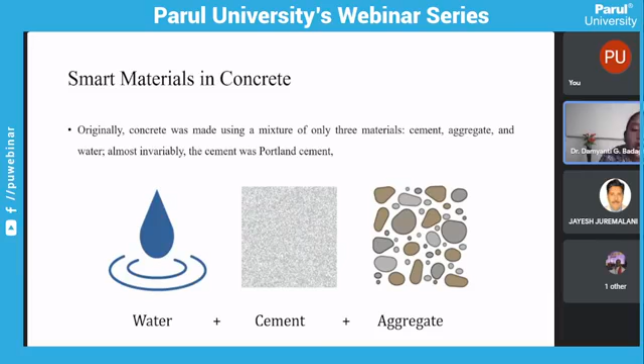So whenever concrete will be there, what we call smart material in concrete is water, cement, aggregate, and admixtures, super plasticizers, various types of supplementary cementitious materials. There has been lots of research done on this as well.

Why am I telling you this with that much confidence? Because I completed my PhD especially on this topic, and I did lots of research by referring to so many literature surveys and by visiting many industries.

So with much confidence I can say that different types of supplementary cementitious materials are available in the market, available with various industries as their byproduct, as a raw material, or as a waste material. These materials enhance the properties of concrete in different fields, and are also advantageous in cutting costs, and there are lots of positive factors of these materials. That's why these materials are called smart materials in the field of concrete, because they increase the strength and enhance the various properties of concrete.

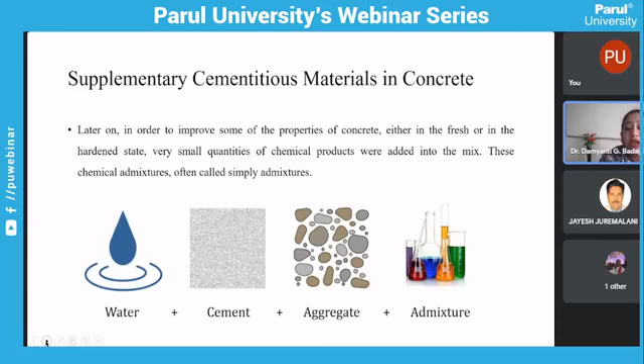So simply we can say water, cement, aggregate, admixtures, then super plasticizer, supplementary cementitious materials. Whenever admixture, super plasticizer, and supplementary cementitious material come into the picture while making concrete, we can say yes, this is the smart material when we are talking about concrete.

So there are different types of supplementary cementitious materials there in various forms. But why is this called supplementary cementitious material? Because we are using it in place of cement.

My dear audience, I want to be very clear that whenever we are making 1 ton of cement production, concrete production, at that same time 1 ton of CO2 emission is generated in the environment, and this is very bad for our civil engineering field. Because no doubt we are doing development, but simultaneously, because of our development and our concrete and cement manufacturing process, if CO2 is generating, this is a matter of problem. We have to look after how we can overcome that problem, right?

So we investigated supplementary cementitious materials, which are the byproducts, or we can say these are industrial waste collected from different industries. So we can say we are helping various industries with their waste management problem by collecting their waste in our construction field. Then whenever we reduce the use of cement in concrete manufacturing, we directly reduce the CO2 emission in the environment, because less use of cement means less emission of CO2 in the environment.

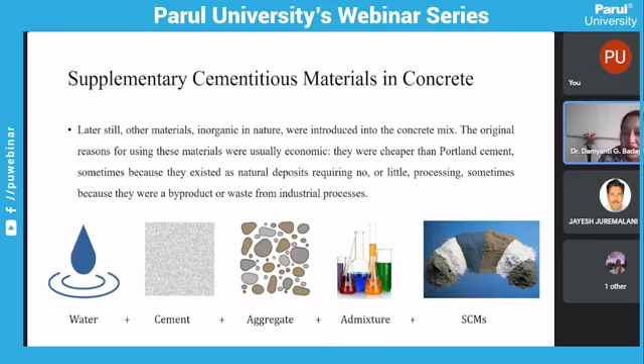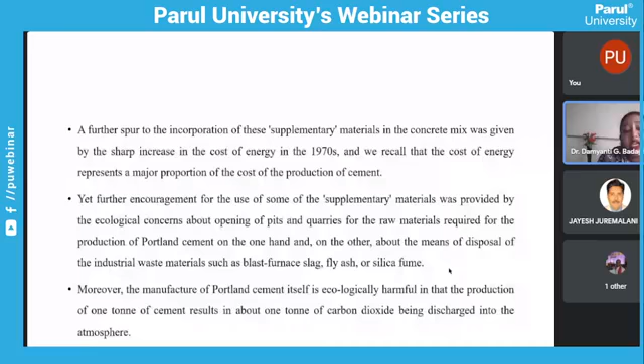So whatever general term I wanted to discuss, we already discussed in a formal talk, so I will not read the PPT. But yes, it would be incorrect to infer from the previous historical account that supplementary cementitious materials were introduced into concrete solely by the push of their availability, right? These materials also bestow various desirable properties on concrete, sometimes in a fresh state, but more often in a hardened state.

Whenever concrete will be there, we are mainly focusing on hardened properties, but not only hardened properties - whenever concrete is in a fresh state, in a workable condition, its properties are also advantageous, like its flow, whether it is workable or not, whether it is pumpable or not, right?

So these properties are also enhanced, and after the hardening of concrete, means after 28 days, or we can say after concrete exactly hardens after some time, what will be its strength in different aspects - not only compressive but tensile, flexural, impact, okay, then abrasion value, toughness - so many factors will come under hardened state.

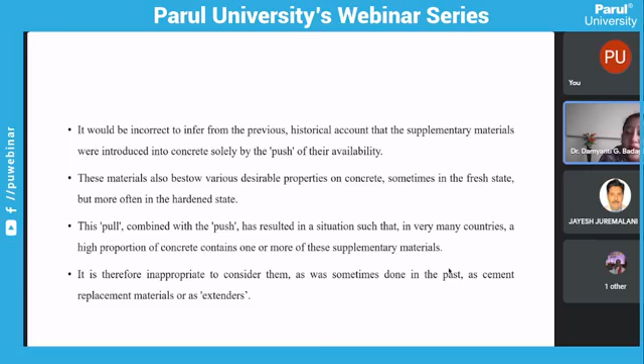Supplementary cementitious material enhances both hardened and fresh properties of concrete. It is therefore inappropriate to consider them, as was sometimes done in the past, as cement replacement material or extenders. They are exactly a smart material when considering supplementary cementitious material in concrete production.

If many of you are aware of this material, we will discuss it in detail. Before that, we will go through the list of supplementary cementitious materials currently being used in the field, which have really good properties that enhance concrete, and what smart role they play in concrete production work.

There is a list like fly ash, ground granulated blast furnace slag, rice husk ash, nanosilica, silica fume, metakaolin, municipal solid waste ash, bagasse ash, and lots of other materials. As time is constrained, we will try to cover most of the material.

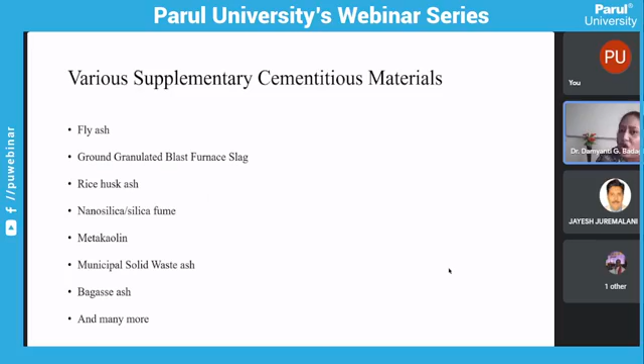The list is very vast. There are lots of materials, but these are the complete materials which practically fit for use in concrete manufacturing. Many people are using them in their research, and in some places they are using them in construction work too. But because of lack of awareness, lack of knowledge, or maybe some fear, people are not revealing what they used.

When I completed my PhD and wanted to check whether that material is suitable or not, I collected waste from one of the local steel industries and used that waste as a cement replacement for concrete manufacturing purposes. That material was found to be very good, because what we did was a 10 to 100% replacement at 10% intervals, like 100% cement will be there.

Our concrete made from 100% cement, but afterward we collected steel industry waste converted into powder form. So with 90% cement, waste will be 10%; with 80% cement, waste will be 20%. Such different variations we did, and lots of cube casting and lots of work we have done.

But afterward we have to see that this is laboratory work. We have to do practical work in a very good manner, but when we are actually using it in the field, is it visible that the structure can sustain or not?

So that material we used in Ichhapur for one water tank, and around a 200 to 300-meter road was prepared from that material. That work was done around 2017, and now it is 2021, but that structure is still in very good condition, and we are continuously monitoring whether there is any defect, crack, or bad thing in that structure.

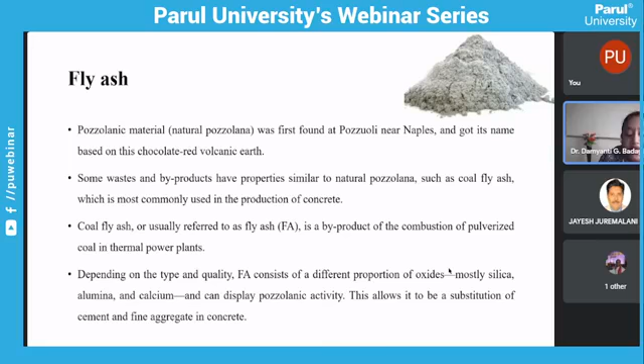Depending on the type and quality, fly ash consists of different proportions of oxides, mostly silica, alumina, and calcium, and can display pozzolanic activity too. This allows it to be a substitution for cement and fine aggregate in concrete, meaning in place of cement and in place of fine aggregate, we can use fly ash.

Besides fly ash, coal burning power plants also generate bottom ash, which consists of coarse granular particles collected at the bottom of the coal furnace. These particles are very porous, irregular, rough textured, and lighter than natural aggregate.

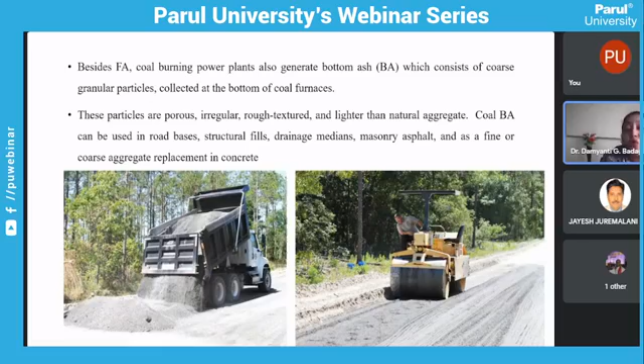Coal bottom ash can be used in road bases, structural fill, drainage medians, masonry, asphalt, and there are lots of uses of fly ash in granular form and in powder form also. These pictures are taken from Google, just showing the use of fly ash in road making activity, which is also our field of civil engineering.

Generally we are talking about the use of fly ash. From this pie chart, you can understand that for structural fills or embankments, 46.6% of fly ash is used in that sector. In agriculture, it's less than 0.1%. For mineral filler in asphalt, around 0.2% is used. In mining applications, blasting grit, and roofing granules, there is 1% use each. For waste stabilization, solidification, soil modification, snow and ice control, concrete, and various aggregate products, there are other uses too, mainly in road base.

From this pie chart, we can understand that fly ash is being used in different places in a very good manner. This is one of the good supplementary cementitious materials when we talk about concrete.

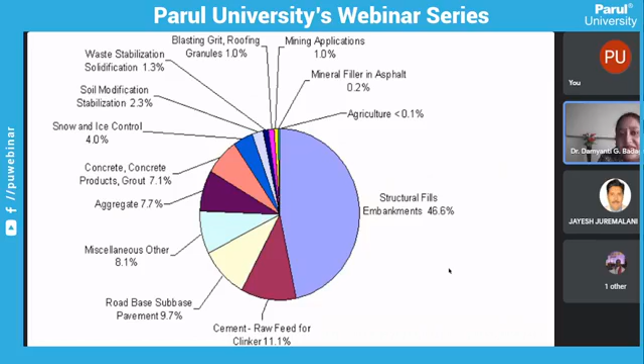So what is the characteristic of this material? Fly ash is a byproduct material and its physical, mineralogical and chemical properties strongly depend on the type and mineralogical composition of coal, processing condition of the furnace, and the collection and storage of the fly ash. These properties vary not only from one power plant to another, but also within one plant. It's not like fly ash will have similar good properties at all places, because at every place the ground level, geological conditions, and soil type are all different.

So if one plant is there, in one batch fly ash has a certain property, but in a different batch, the same property will not be there. There will be some variation, around 10%. In our field, 10% variation is allowed when we talk about any product, in view of concrete only. I'm not talking about any other material, but concrete.

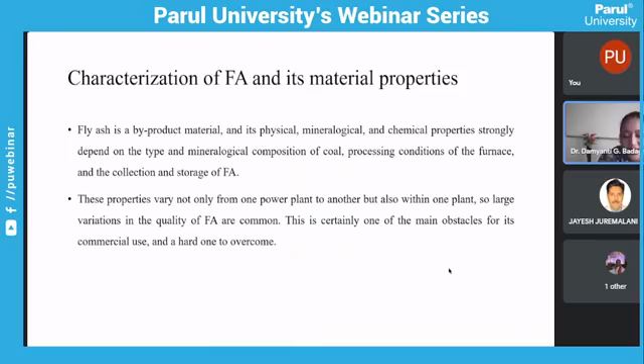Now we talk about physical properties. Scanning electron microscopy, or SEM, shows that fly ash is a heterogeneous material containing particles of different dimensions and shapes. We are all aware of that. Generally, fly ash particles can be rounded, irregular, or angular, but they are mostly spherical. The particle surface is generally smooth, but it varies between different types of fly ash.

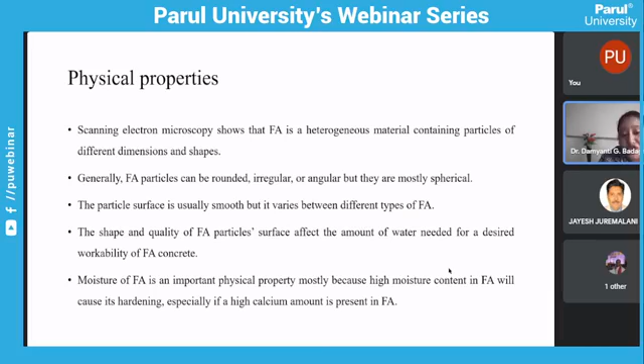Now we talk about chemical and mineralogical properties. The major ingredients of most fly ash are silica, alumina, calcium, and iron oxides. Besides these, magnesium, sodium, titanium, sulfur, and potassium are chemical compositions present in fly ash. But unburned carbon, generally measured through loss on ignition, is also an important constituent influencing high water and admixture requirement in concrete containing fly ash.

Why am I talking again and again about high water and admixtures? Because whenever high water is there, there are chances of decrement in concrete quality. That will not be a good quality concrete with a high amount of water. But this material is smart, having good properties, and the only disadvantage is that it takes much water.

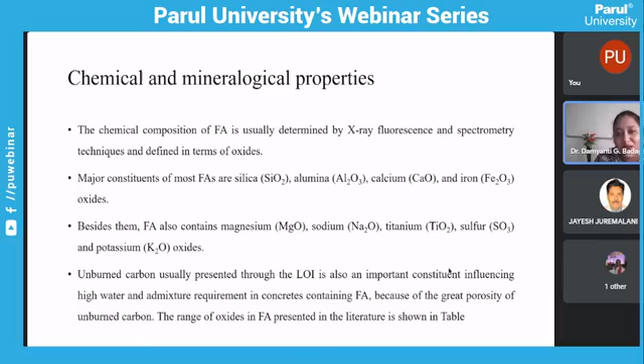There is one negative factor in fly ash concrete: whenever we are using fly ash in concrete manufacturing, we need high water. So how do we reduce that? That's why, because of that negative point, people question how we can consider fly ash a smart material. But yes, it has lots of good properties and advantages. Only one parameter is a concern, that it requires high water, but we have a solution in the form of a super plasticizer or admixture. So by using that, we can consider it a smart material in concrete production.

There are classifications also, based on its color, shape, size, and where it is available: class N type, class F type, class C type. Natural pozzolana such as volcanic ash, calcined clay, metakaolin clay, rice husk ash, such products will be there, and from that we are collecting ashes. So this is class N type.

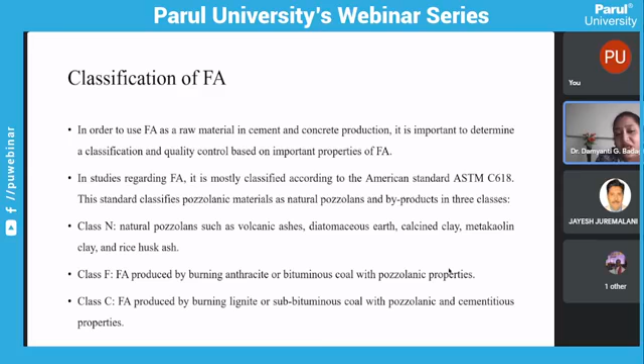If fly ash is produced by burning bituminous coal or has pozzolanic properties, that will be class F. And if we are talking about lignite or subbituminous coal, and we burn that and collect the ash, that will be class C. So based on the availability of material, whatever we are burning and what is the final product, that determines the class for fly ash concrete.

There is also a European standard classification, like A, B, C, based on LOI, loss on ignition. Maximum LOI less than 5% comes under class A. Maximum LOI less than 7% comes under class B. Under classification C, maximum LOI will be less than 9%.

And based on fineness, how fine it is, there are two types, type N and type S. If less than 40% retains, meaning it will pass through 45 micron Indian standard sieve, that is type N. And if the material retains on the 45 micrometer Indian standard sieve after sieving, that will be type S.

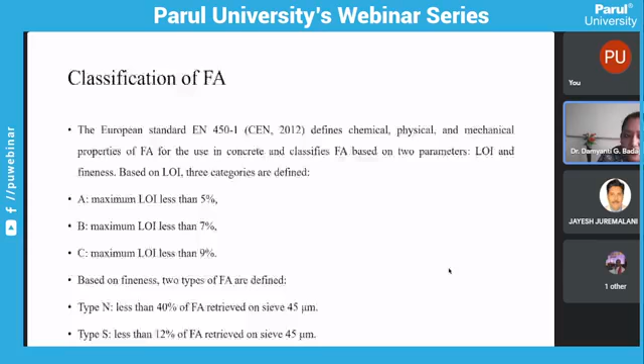Like many years ago, a researcher did such research and got certain data. Is it that after 100 years we will get the same result? So what is the research, what is the advancement, and what are we finding now? Whenever we use any guideline, specification or standard, we have to consider it as a base. But we must keep in mind, if the reference value is 50 and we are getting 100, then there is a matter of concern and we need to research why it is 50 versus 100. That much difference we can't tolerate, but in our concrete field, we expect up to 10% variation, plus or minus.

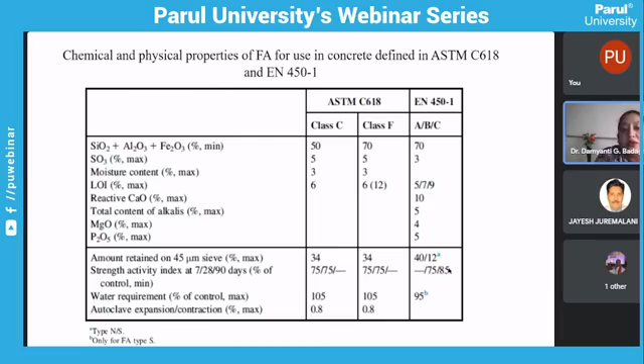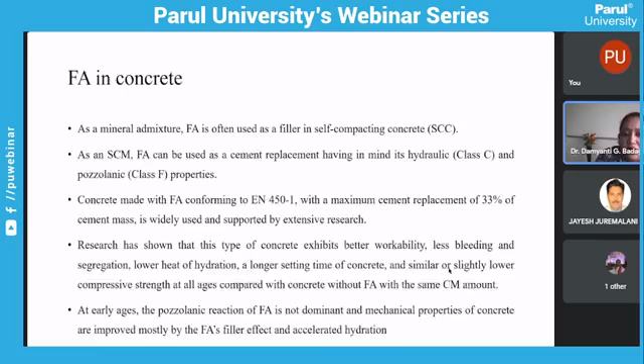Fly ash in concrete, as per American standard, European standard, and available guidelines, maximum cement replacement of 33% of cement mass is widely used and supported by extensive research. So whatever good properties the concrete has, exactly 33% replacement with cement can be used.

CanMet: in 1985, the Advanced Concrete Technology Group of CanMet Canada started a project to develop structural high performance, high volume fly ash concrete, called HVFAC.

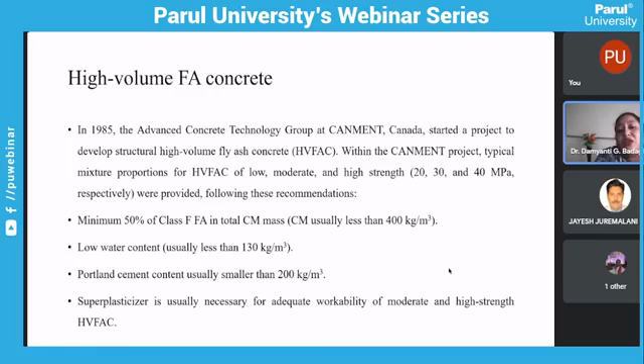Within the CanMet project, typical mixture proportions for low, moderate, and high strength were fixed at grades like 20 megapascal, 30 megapascal, and 40 megapascal. For the 20 megapascal strength after 28 days of curing, minimum 50% class F fly ash in total cement mass was used, less than 400 kilogram per meter cube cementitious material. Lower water content was used, 130 kilogram per meter cube, and Portland cement generally less than 200 kilogram per meter cube. Such data was used by CanMet Canada to produce high volume fly ash concrete.

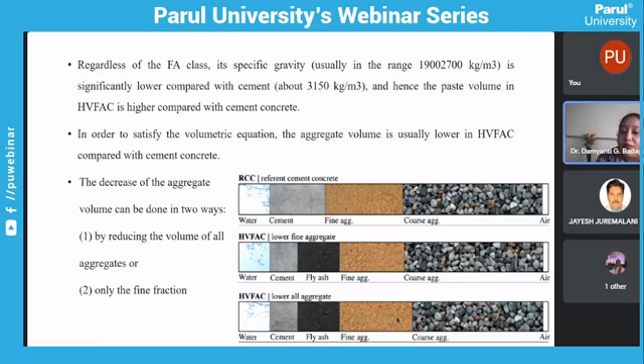So we can say fly ash content in high volume fly ash concrete stays the same across different categories of concrete manufacturing, but by adjusting fine aggregate and coarse aggregate — if we use more fine aggregate, coarse aggregate will be in a lesser portion, and if we use less fine aggregate, coarse aggregate will be in a higher proportion. So by using fly ash in place of some cement, we can make high volume fly ash concrete.

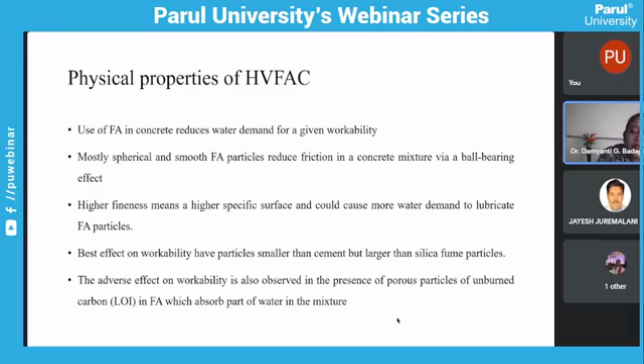In fly ash concrete, this reduces the water demand for given workability. It is spherical and smooth, so we can say workability properties will also be good in high volume fly ash concrete.

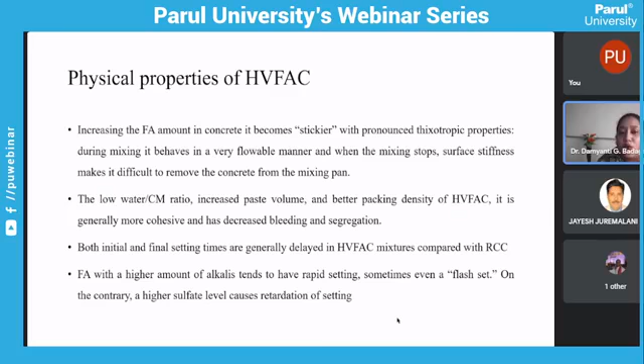The low water cement ratio means bleeding and segregation problems will be avoided. Whenever concrete manufacturing is done, if you visit any site, you can see this bleeding segregation problem where concrete lump is at some place and water comes out from that lump, meaning concrete is not properly mixed. Such problems occur on field, but when we use this type of concrete, we can avoid such problems.

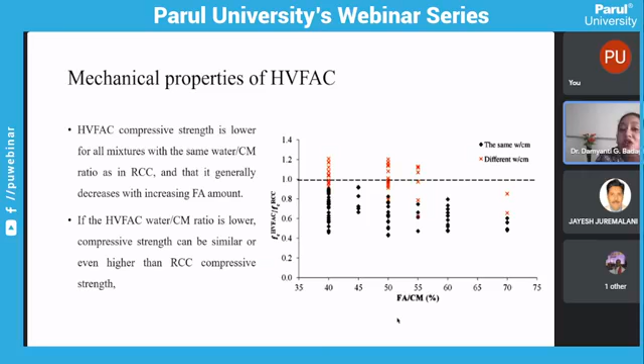Whenever we go for a high water cement ratio, we definitely have to compromise with strength, and in concrete we can't compromise with strength, so we have to find an alternative solution. This deals with the strength and water cement ratio discussed in the previous slide.

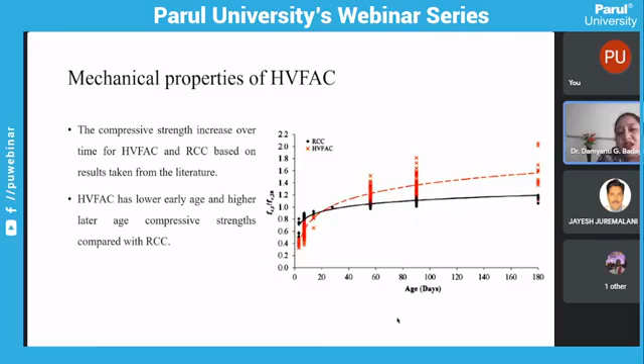So, reasons for lesser use of HVFAC: we discussed so much, but why aren't we using this high volume fly ash concrete that much? There is a little inconsistency of fly ash characteristics, and lower early age strength — if we need early age strength very quickly, it will not work in those places.

And right now, construction is going on in a very fast manner, so that will not work out.

There is contradiction in the results found in the existing literature regarding physical, mechanical, and durability properties, meaning different researchers have different results, with not much similarity. So there are lots of contradictions and result variations, and people get confused to use HVFAC in a practical field, which is why it's not in proper use.

If we do a series of tests one by one on that HVFAC, then we can get an exact idea of how much amount we have to use and how we have to use it.

There is also a lack of adequate standards, no perfect guideline, and a lack of results regarding full structural elements made with HVFAC. There is very little data available regarding structural elements prepared from HVFAC, which is also a reason people are not using HVFAC in a good way.

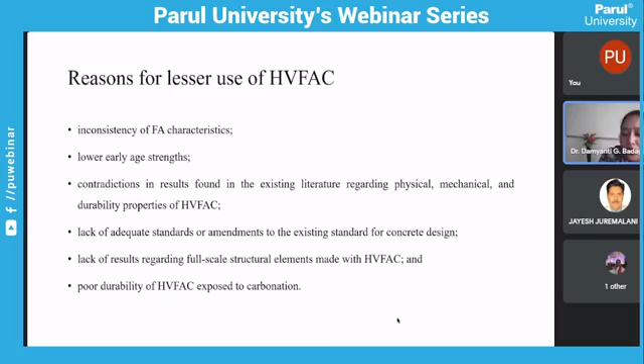Then there's poor durability. We can't blame this on the fly ash itself, but on lack of knowledge, lack of awareness, lack of standard availability, and lack of consistent results or test series in that field. So we can't blame the material.

Then another material is GGBFS. Most people know GGBFS. This is the material we collect from the steel industry during the iron ore process. Whenever we are extracting iron ore, a granular sand type of brownish or whitish material comes out during the process, and that material is ground granulated blast furnace slag.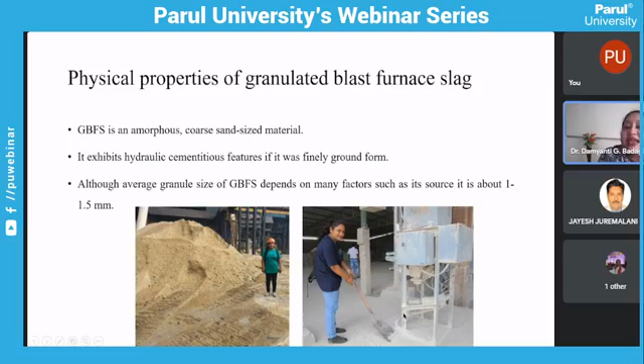So these are the physical properties of GGBFS. If any material will be used, we first have to look at its physical and chemical properties, because we are using it in concrete as a supplementary cementitious material.

Material can be used in place of cement or in place of aggregate. But here we are talking about it in place of cement, because if I discuss each material by focusing on fine aggregate replacement, coarse aggregate replacement, cement replacement, and water alternatives, I think I'd need a week to explain everything. But since I have limited time, I'm focusing mostly on cement replacement type materials. If anyone is interested, they can get my contact from the organizer, and I will share every detail and knowledge with you guys.

Whenever we talk about any material, we have to focus on physical and chemical properties first, because we are doing this for cement replacement. So these properties should be similar to cement, or matching, or nearby to cement. That's why in each and every slide I will share the physical and chemical analysis properties, so you can see these properties are similar to cement and we can use it with confidence as a cement replacement.

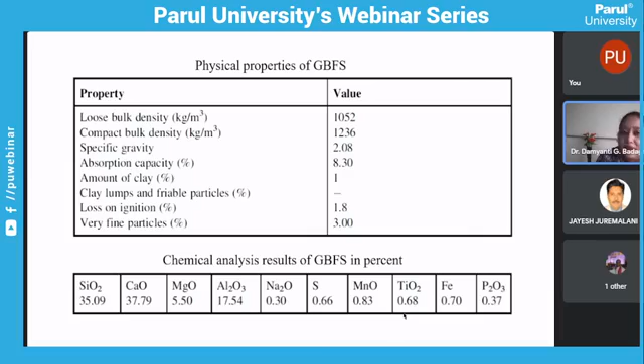So these are the chemical properties like silica, alumina, calcium, magnesium. As civil engineering people, we know that these types of constitutions, or compositions, should be there in cement. So definitely any supplementary cementitious material, or any material similar to cement, should have such elements. Blast furnace slag is a glassy material when cooled rapidly by water.

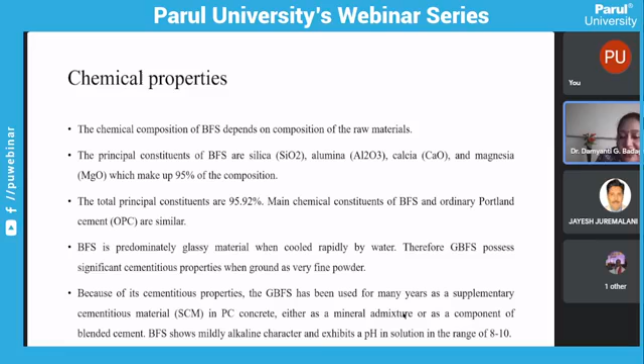As per the figures I showed you in a previous slide, this is a granular material and we have to grind it, and then we can use it as a supplementary cementitious material in place of cement.

When we talk about the fresh properties of mortar and concrete containing GGBFS, the blast furnace slag increases workability. So if workability is good, we can use that concrete mortar in any place. Compaction factor test results show that the water-cement ratio decreases in order to maintain the same workability of concrete mix compared with 0% GGBFS.

Whenever we increase or use GGBFS, our concrete workability will be improved, but up to a certain limit. If I discuss my case, I performed a test series. Why am I saying this with confidence? Because I tried all variations from 100% cement down to 10%, 20%, 30%, 40%, 50%, 60%, 70%, 80%, 90%.

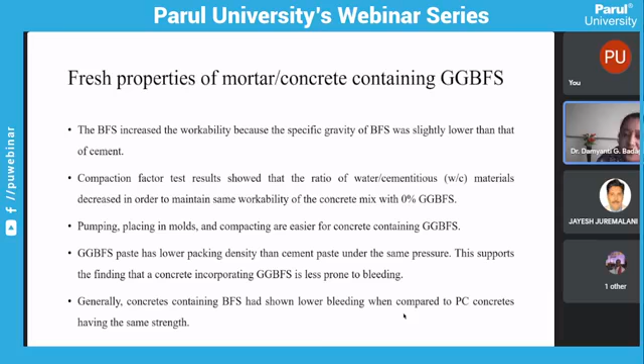All variations I tried, and for all variations I checked the strength. So from my research, my experience, and the data available to me, based on the continuous test series I conducted, I can share that 50% replacement of GGBFS is very good.

If I summarize GGBFS as per my knowledge, experience, and work, then with 50% replacement of GGBFS with cement for concrete manufacturing, we can make a very good grade of concrete, like high performance concrete or high strength concrete, having good tensile properties, good flexural properties, and all the mix parameters will be good.

We can use GGBFS in a very good manner, because this is my personal experience as I did a lot of work on it. For other materials, I am sharing the experience of other researchers and literature work.

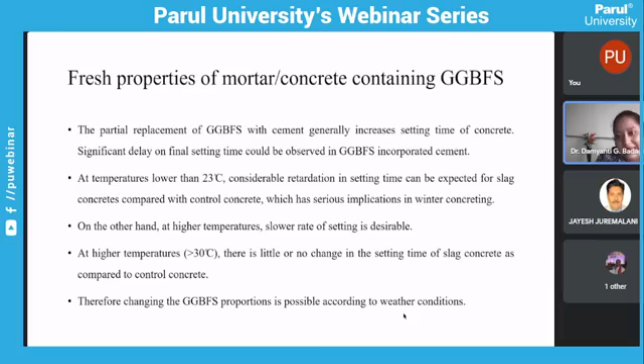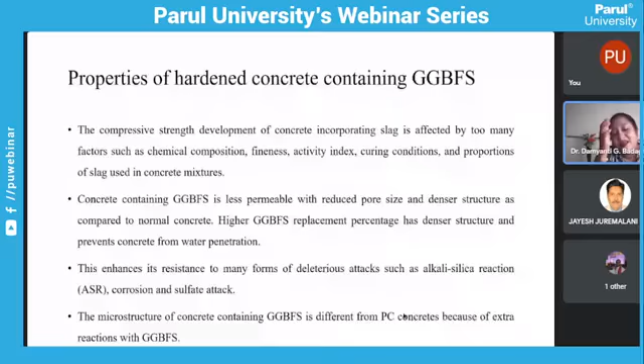After 28 days, 3 days, 7 days, 50 days, 60 days, 90 days, 120 days, or even till 180 days — after 6 months also, we got very good results.

My dear friends, that was my PhD work, so it was not possible for me to continuously test for 1 year, 2 years, 3 years, 4 years, because I also had to write my thesis and complete my PhD. So till 6 months and 1 year, we tested the results and found them good.

We still have lots of specimens from that, and we still have them, so yes, we can test it further.

As I told you before, we prepared one small road, about 300 by 200 meters, and one water tank, and both are still existing in good condition. So we can say that whatever work we did was actually good and done in a true manner.

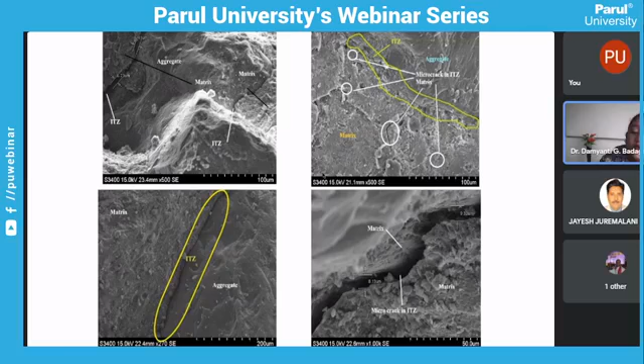From that SEM image, we can see there is a good bond between the matrix — matrix meaning your cement, aggregate, and water. So there's a good bond between the matrix when we use 50% GGBFS as a cement replacement. And as I told you, its hardening properties are good.

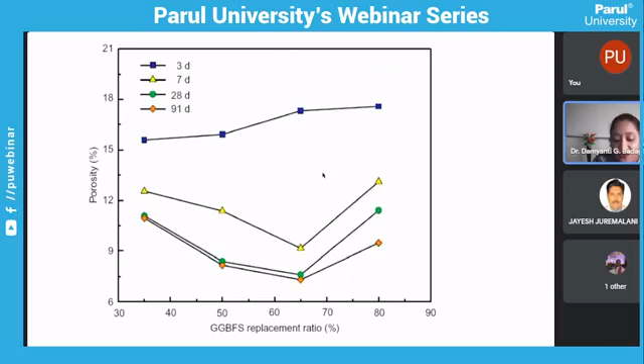Here you can see the result of porosity with GGBFS replacement. As I discussed, whenever we are preparing concrete from GGBFS, its properties are definitely good.

When we talk about rice husk ash, rice husk is the hardened protective covering of rice grains that we burn, and whatever ash remains is rice husk ash. The characteristics of the ash depend on the composition of the rice husk and the burning temperature and burning time.

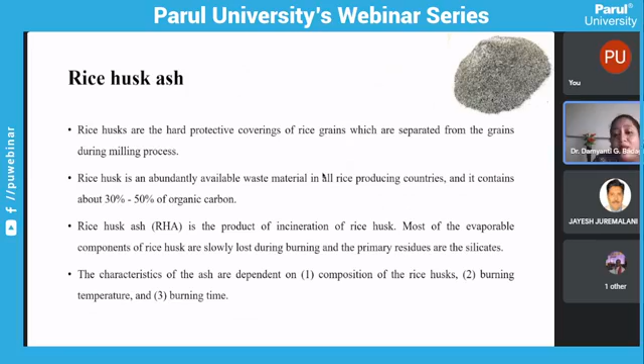This is the schematic diagram. By discussing it line by line, I will prefer to explain that figure.

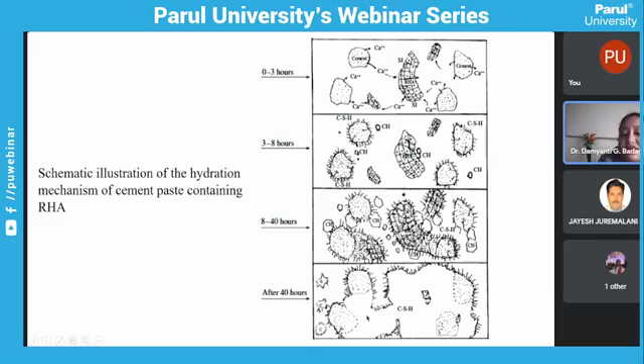Here from 0 to 3 hours, you can see that calcium is there, silica is there, cement is there. This is the hydration mechanism after 3 to 8 hours. This is the mechanism after 8 to 40 hours. And after 40 hours, you can see the exact CSH gel formation in a rice husk ash concrete, right?

Rice husk ash, as a blended cement, is known to contribute to concrete strength from as early as 1 to 3 days after maturing. In addition to its contribution to strength, even at a relatively small replacement dosage of 10% by weight of cement. So in rice husk ash, if we are focusing on good results, the material is smart and good, but the replacement percentage we have to decide.

Is this material good at a 10% replacement? So definitely this is a smart material, but if you are using it beyond the limit and you are decreasing the concrete strength, then that is our own fault.

Fine, because everything has its own limit. We are human beings, we also have our own limit. We can carry only a few amount of load, not more than that. So we can't say that you are weak people, you are weak. Okay, so all materials have their own limitations. So in rice husk ash, we can see that 10% replacement is what we can do.

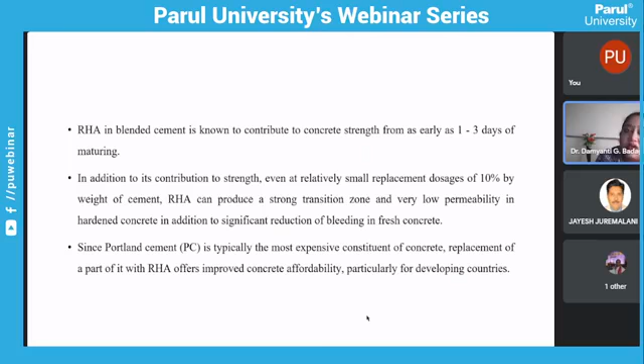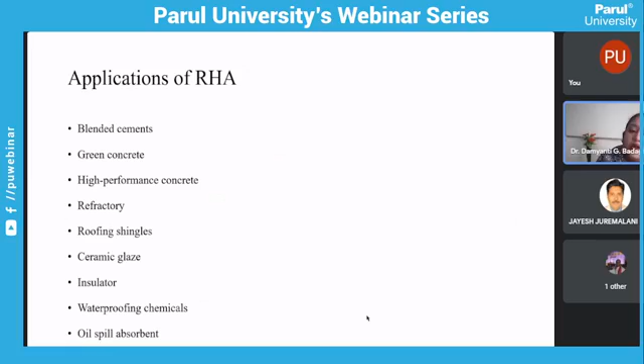And there are lots of applications of rice husk ash. This is like in blended cement, in green concrete, in high performance concrete, in refractory, in roofing shingles, ceramic glaze, insulators, waterproofing, oil spill absorbent, right? So these are the applications of RHA.

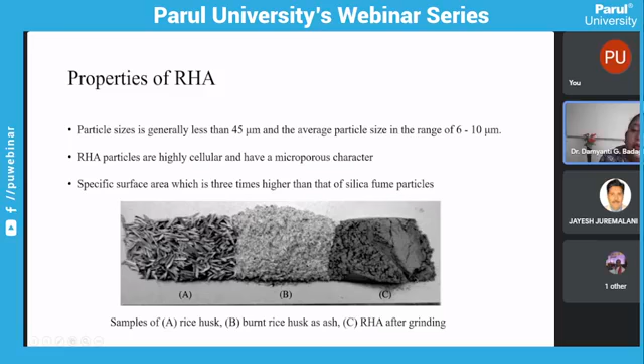And here you can see simply that rice husk, its cover, after that it's burnt rice husk, and after that the grinding of that ash. So in A, B, C, the C portion looks similar to cement. And as I told you, I will share all the chemical and physical properties.

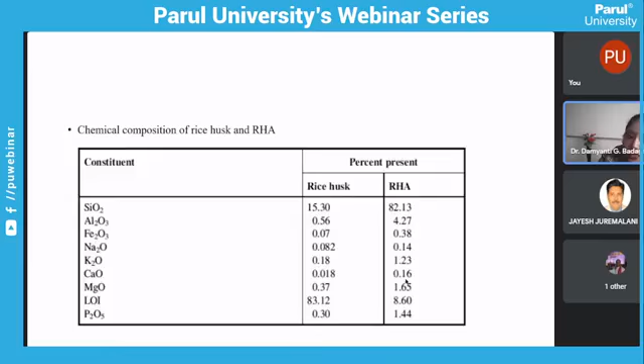So here you can see the compositions. Whatever we observe in cement, such type of compositions are there. And here from the table, you can exactly get the idea of concrete which we made from RHA.

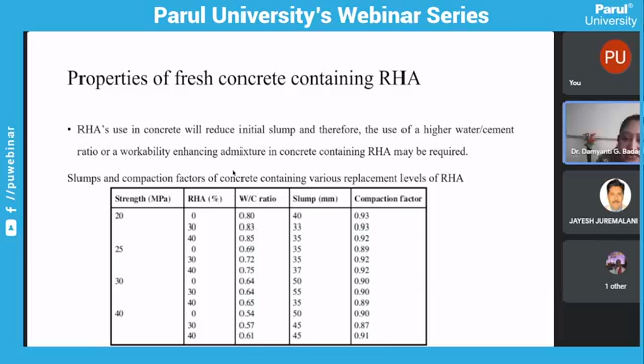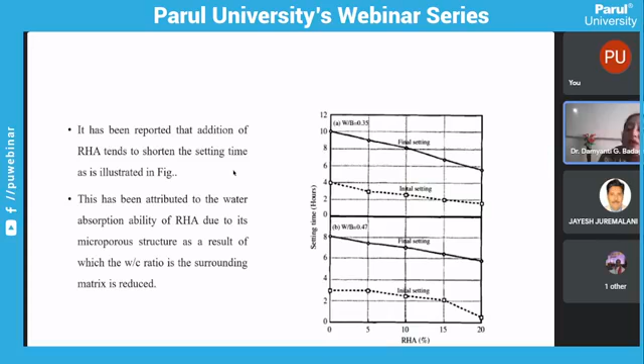So here you can see the final setting and initial setting time, water binder ratio, and rice husk ash percentage replacement. All this data I'm discussing is based on other researchers' experience, not my own experience. But whenever we are reading any book or any literature, based on that we can discuss that if we use such type of things in such a manner, such type of effect will be there. So my summary from rice husk ash will be 10% variation is good, right?

So properties of hardened concrete containing rice husk ash: this achieves a higher strength relative to control concrete. In general, strength will be increased up to 15% compared to control concrete, and this is a good sign, right?

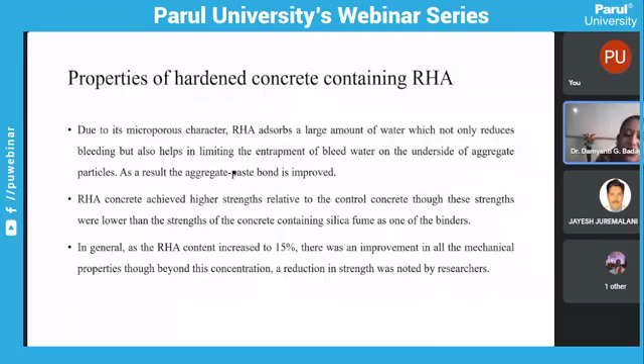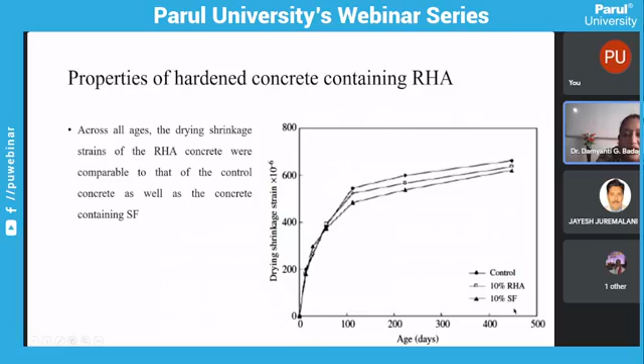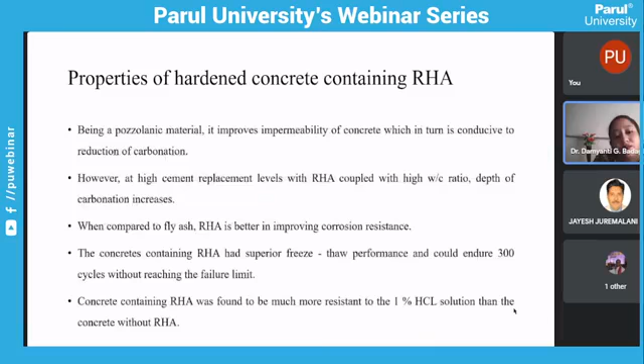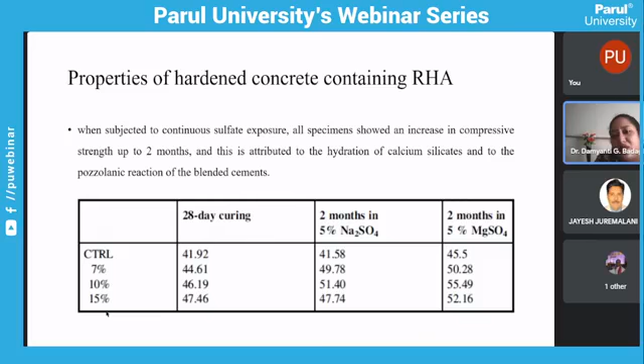Then here you can see control concrete, 7% replacement, 10% replacement, 15% replacement, and there is some durability testing also. They tested their concrete cubes after Na2SO4 curing and after MgSO4 curing, and they found good results compared to control concrete, meaning 100% cement. With different replacements they got good results in strength and also in durability. So rice husk ash is a good material, a good smart construction material we can use in concrete manufacturing.

Then nanosilica, silica fume. This is a byproduct of the smelting of silicon and ferrosilicon industry.

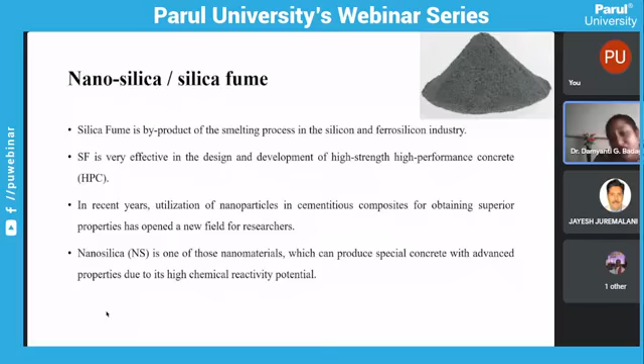This is very effective in the design and development of high strength, high performance concrete. This is now a trend. But nanosilica is one type of nanomaterial, so when we are dealing with that, we have to consider so many safety measures. Otherwise it will trouble the health and create lots of health issues.

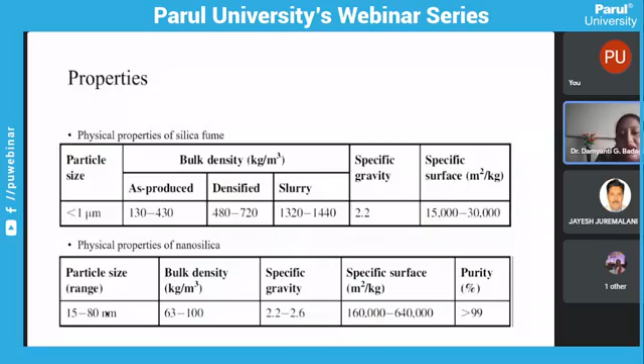So here again, physical properties are given - silica fume and nanosilica, all properties are given. Due to very fine particles, the surface area of a given mass of silica fume is very large. Silica fume powder is commercially available in white and gray color. Silica fume consists of very fine particles composed of pure silica and holds high content of silicon dioxide. This non-crystalline silica is the main cause of pozzolanic reactivity of silica fume. There are some trace oxides of iron, magnesium, and alkalis also present in very low percentage, depending on the parent metal from where we collected that silica fume.

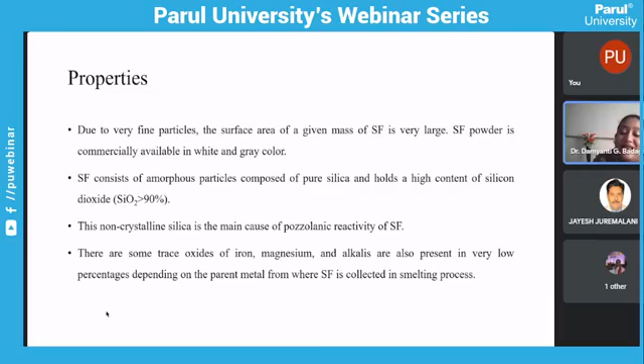There are little bit strength and durability issues, but again, my comment is we can't blame that material. Why? Because of lack of awareness, lack of knowledge, or fewer standard specifications. No good test series performed. So there are lots of reasons, and because of those reasons, there are strength and durability issues. If one person or one team will consistently work on that particular parameter, altering different variations and changing different parameters, then only they can give confident results.

Mr. X from Sri Lanka, Mr. X from India, Mr. X from another country, they are doing the work at different places, and based on those places, they are giving us results. But if you are staying in India and you have a good team from all the states, from all the districts, one good team will work on that one topic consistently, and they will compare the results - what is the result in Gujarat, what is the result in Maharashtra, what is the result in other states. By comparing that, you can give the perfect judgment.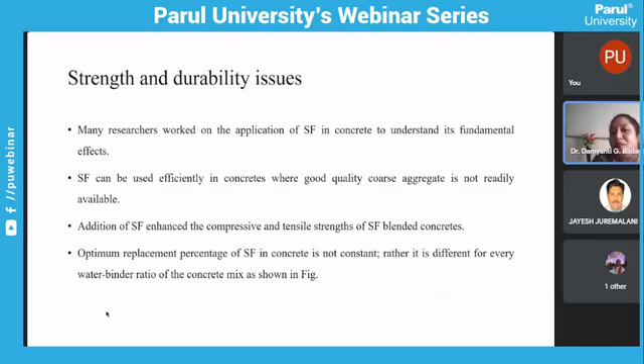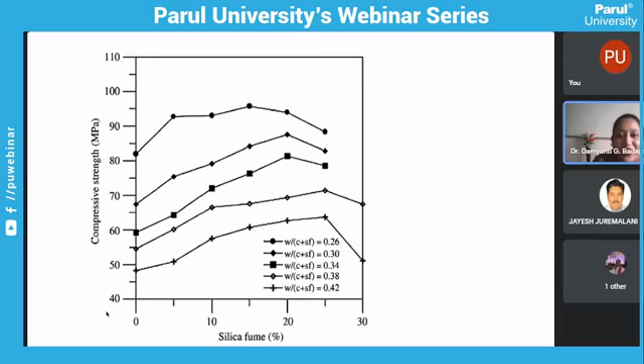So again I will tell you we can't blame the material directly. It is having good properties, so definitely it's a smart material. To make it exactly a smart material, our entire civil fraternity has to think beyond that - we have to do teamwork. Whatever university, whatever college, whatever place, we have to do good teamwork for good results.

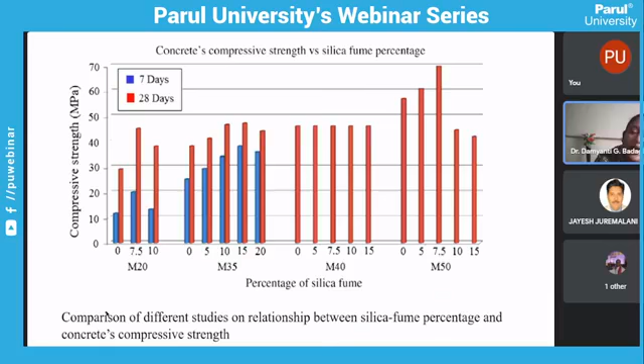So this is the compressive strength of silica fume. You can see the percentage of silica fume and compressive strength. Here M50 grade of concrete is there, so 7.5% silica fume replacement sounds good. In M40 grade concrete, results are there. In M35 grade of concrete, 15% replacement is desirable. In M20 grade of concrete, 7.5% replacement is desirable when using silica fume in place of cement.

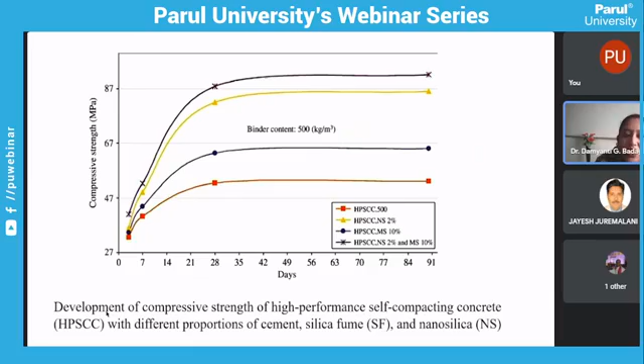Here we can see the development of compressive strength of high performance self-compacting concrete with different proportions of cement, silica fume, and nano silica. When we are using nano silica at 2%, and another material at 10%, we are getting good compressive strength of concrete after various days. I told you there are health and safety issues - this is the limitation, and because of that we are not using that much silica fume.

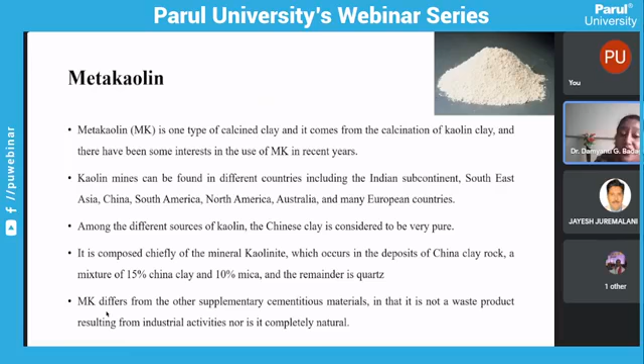When we are talking about metakaolin, this is also from kaolin mines and can be found in different countries including the Indian subcontinent, Southeast Asia, China, South America, North America, and Australia. It is composed chiefly of the mineral kaolinite, which occurs in the deposit of China clay rock - a mixture of 15% China clay and 10% mica, and the remainder is quartz. Metakaolin differs from other supplementary cementitious materials in that it is not a waste product resulting from industrial activities, nor is it completely natural. The purity of kaolin clay varies from 20% to more than 80%.

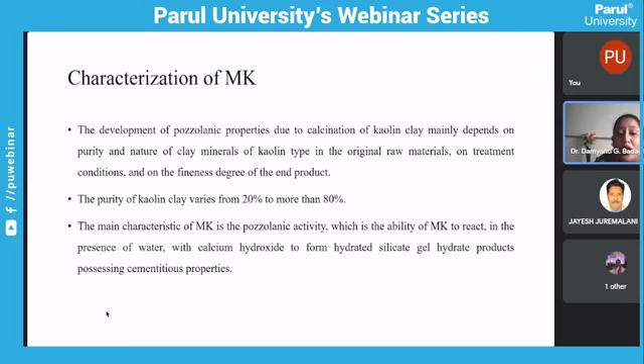The main characteristic of metakaolin is its pozzolanic activity, which is the ability of metakaolin to react in the presence of water with calcium hydroxide to form hydrated calcium silicate gel, a hydrated product possessing cementitious properties, and that is very important. The high reactivity of metakaolin affects cement hydration - heat of hydration may increase, and setting time comes into picture. If temperature rise becomes critical in massive concrete elements, it may lead to thermal stress, so we have to control the temperature of concrete. However, this property is desirable in cold weather concreting. Some concrete are good in cold places, some are good in very hot weather, some are used in marine structures. So every concrete has its own characteristics as per its application.

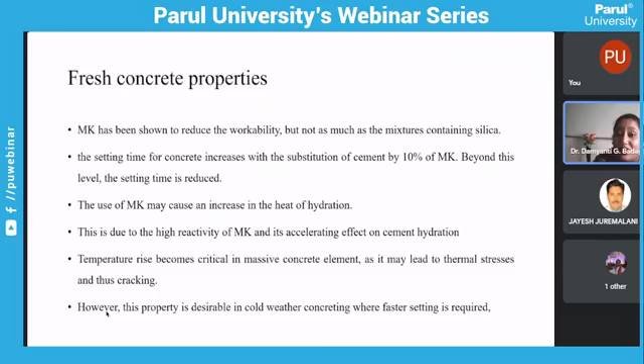That's why we considered it's a smart material. Why? Because in cold countries where temperatures are zero or minus degrees, we can use that concrete. This is the advantageous thing, and that's why we are considering it a smart material.

I think I have to complete in my given time limit. So from all the smart materials, I'm sorry, not all, we discussed just a few. So from those few discussed smart materials in concrete manufacturing, what is the conclusion?

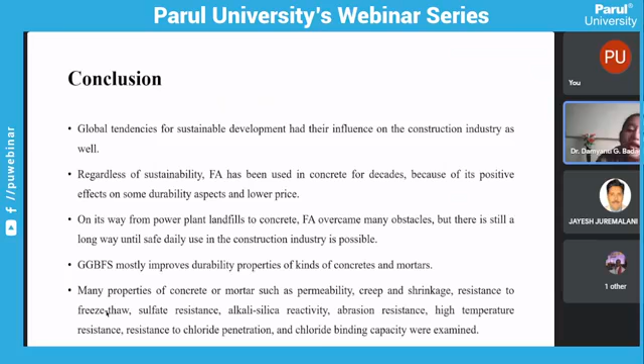GGBFS mostly improves durability properties of concrete and mortar. Many properties such as permeability, creep, shrinkage, resistance to freeze-thaw, sulfate resistance, alkali-silica reactivity, abrasion resistance, high temperature resistance, resistance to chloride penetration and chloride binding capacity were examined. GGBFS decreases permeability of concrete and improves resistance to sulfate and seawater attack.

There seems to be a lack of information about the reaction mechanism of nanosilica. A detailed study is required to investigate the nanochemistry to assess, interpret, and visualize the reaction mechanism. Development of a new family of nano superplasticizers may be very useful for proper dispersion of nanoparticles, which will result in extracting maximum benefit from using nanosilica. Using pozzolanic material in cementitious systems can enhance the durability of the material produced.

These are all the conclusions, but what I will summarize today is that we are developing, we are improving ourselves, we have to improve our technology. As a civil engineering fraternity, whenever we talk about advancement or development, we have to focus that it should increase our economy and also protect our environment. As engineers and responsible citizens of the country, we have to focus on materials which we can use in place of cement or in place of natural resources to save our environment and reduce CO2 emissions. So this is my summary.